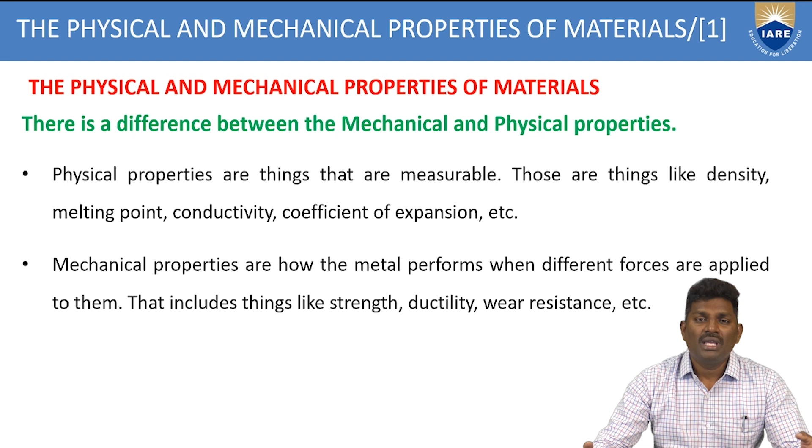For any application, if you want to develop a product, first you have to know the properties. Once you know the mechanical and physical properties, it is easy for us to select one exact component from several options, and that component can be used as an application to the developed product. So that is how physical and mechanical properties play an important role in selecting material for developing any product.

The mechanical and physical properties of materials are determined by their chemical composition. Chemical compositions are also very important - different materials have their own composition, depending upon the carbon content, that is the iron content of the material.

These materials are classified as ferrous and non-ferrous materials. In some applications, you may need ferrous types of materials. So how to identify the ferrous material? The composition is very important - how much iron is contained inside the material.

If you have a larger quantity of iron present inside the material, then it is called a ferrous material. In the same case, if you have less amount of carbon or iron content, those are called non-ferrous. So the composition again plays an important role to differentiate the types of materials and also their internal structure.

So in the previous sessions, we have discussed the different types of structures - face-centered, body-centered, hexagonal close-packed structures. All these structures help us identify how the atoms are arranged inside the body. Depending upon the atom arrangement, we can easily tell the mechanical properties of the material, the grain size, or the crystal structure. The size of the grain present inside the material also plays an important role.

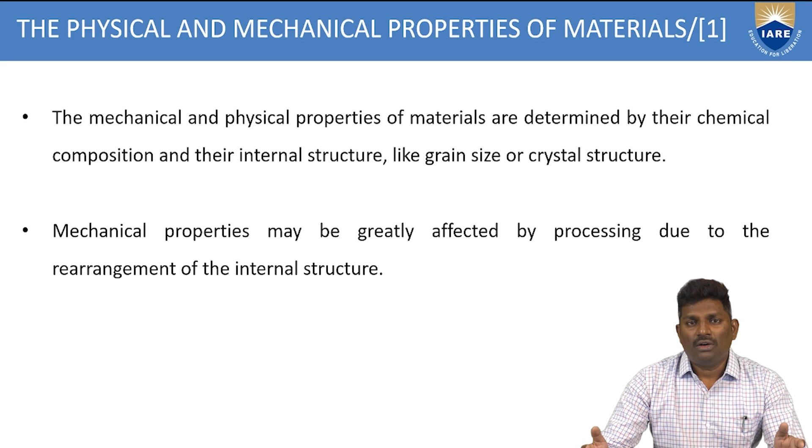Of course, point defects, line defects, any type of defect can be normalized with the help of the preheat process. That's why mechanical properties can be greatly affected or changed by processing due to rearrangement of the internal structure. Whatever arrangement is there internally, if you try to rearrange this structure inside the material, there is a chance of enhancement of the mechanical properties of the material.

Also, the metalworking process or heat treatment process might play a significant role. As we discussed, heat treatment is very important and plays a significant role in changing the properties of any type of material - suppose I have to build a product with some ceramic material or some polymeric material.

This polymeric material doesn't have the standard of properties I'm thinking of. What can I do? I can enhance the properties of that material by adding some other material to it - this is called a composite. But how can I add it? I can't directly combine material A and material B together. So how can I combine them and enhance the mechanical or chemical properties?

I can achieve this performance through heat treatment process or metalworking. In this metalworking and heat treatment process, I heat the material. Once I heat the material, I can make any number of changes to it - I can add other material, or I can manufacture different shapes. All these things can be achieved.

That's why the metalworking process or heat treatment process plays a significant role in affecting physical properties like density and conductivity. These are the main things which can be enhanced or changed with the help of the heat treatment process.

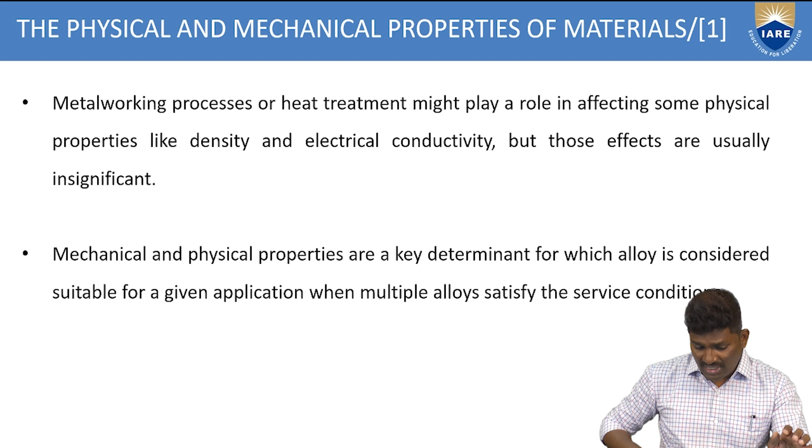High strength, for example, may be achieved at the expense of low ductility. The mechanical properties like strength and ductility can all be improved, depending upon your application. So selection of material is very important, based on which best material is selected for the required application.

In some cases, a high amount of load may be applied. If you see bridges, there is continuous load as all the vehicles pass over them. So the bridge has to resist this continuous load. Depending upon the type of load and the maximum load it can withstand, you have to design your structure in such a way that the material plays a key role there.

That's why material is very important - what type of load you are dealing with is one thing. Next, suppose you want to store a hot liquid in a flask - what type of material do you select? This hot fluid has to be sustained for about 5 to 6 hours. So if you know the exact application, only then can you select the material.

Selection of the best material is very important, and this selection depends mainly on the properties of the material. Once you know the properties exactly, it's very easy to select the material.

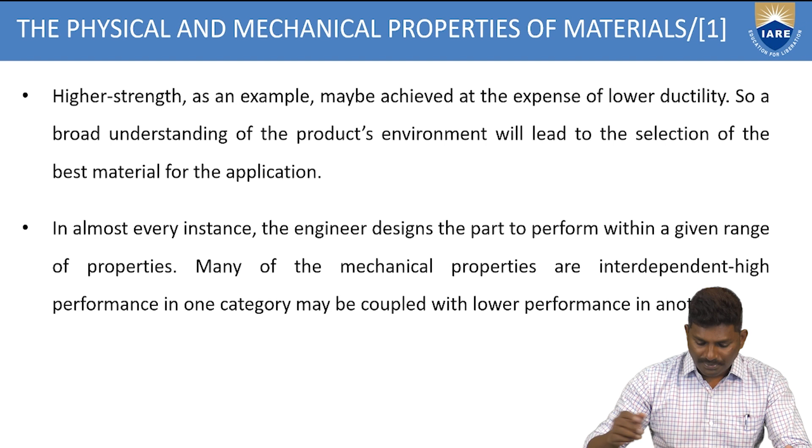That's why everything has some expiry limit - after that time there can be failure, and you have to stop at that point. Depending upon the maximum limit, engineers design the exact frames or bridges we construct. All this depends upon the load bearing capacity, so that is important.

Now, what are the main properties that influence materials? Some common mechanical and physical properties must be considered while designing any structure related to mechanical, civil, or aerospace fields. Material science is not restricted to mechanical engineering alone - all types of groups come into this. It is a multidisciplinary area where computers, electrical, aerospace, mechanical, civil - everything - materials play an important role.

Selection of material in any type of application is very important, and we select based upon the properties. The important properties we have to identify related to material selection are: first, conductivity; second, corrosion resistance; density; and fourth, ductility or malleability.

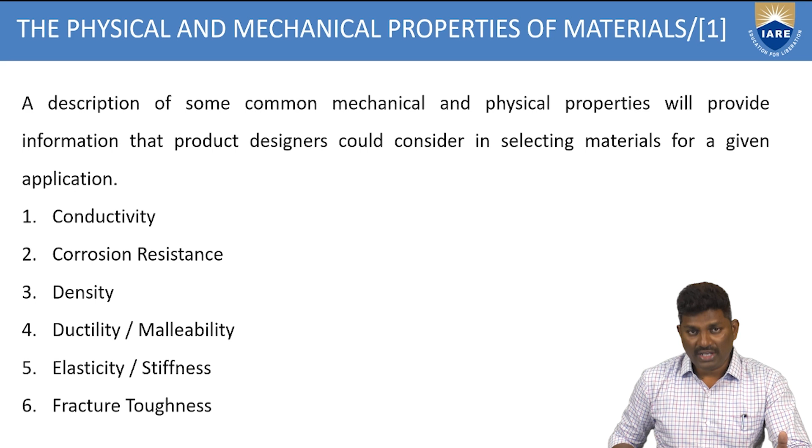Fifth one is elasticity or stiffness. Sixth is the fracture toughness, hardness, and of course the plasticity, strength, that is nothing but in terms of fatigue, coming to the shear, tensile and yield. The last one, toughness and wear resistance.

So these are some of the important parameters or properties which we have to take into consideration while designing any type of structure related to any type of engineering. All these properties have to be taken into consideration. Then only one can design or construct a good output.

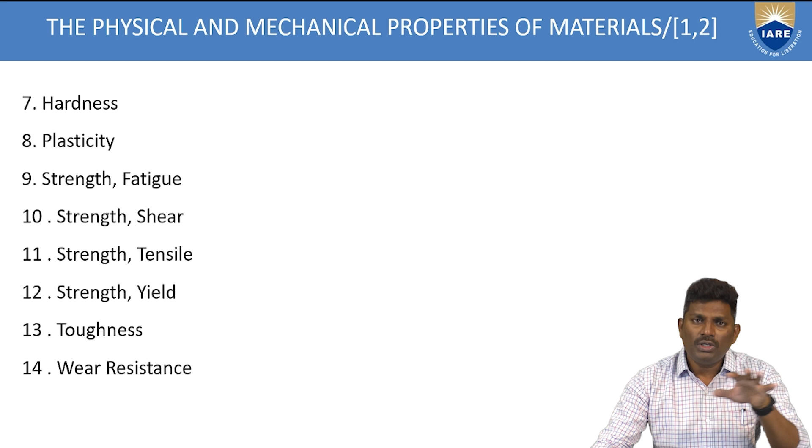So what is conductivity? How to define conductivity? How much energy is penetrating into the body? Here the energy is nothing but the heat. So how much amount of heat or energy is penetrating inside the body? This depends upon the conductivity - how much amount of energy is conducting into the material.

Based upon the conduction, you have to select the material. Depending upon the conductivity, each material will have its own thermal conductivity - that means how much amount of energy it can take inside, absorb in the body. Thermal conductivity is nothing but a measure of the quantity of heat which flows through the material.

So depending upon the value of the thermal conductivity, can you resist the heat or can you penetrate the heat into the material? All this depends upon the selection of material. So conduction is very, very important, which describes the amount of energy which is penetrated inside the body.

And it's a measure of degree per unit time, per unit cross-sectional area, or per unit length. This is how you will calculate how much energy is penetrating into the body per degree, per unit length, or per square meter. Like that you will try to identify and calculate how much energy is penetrating inside the body, and what this conductivity refers to.

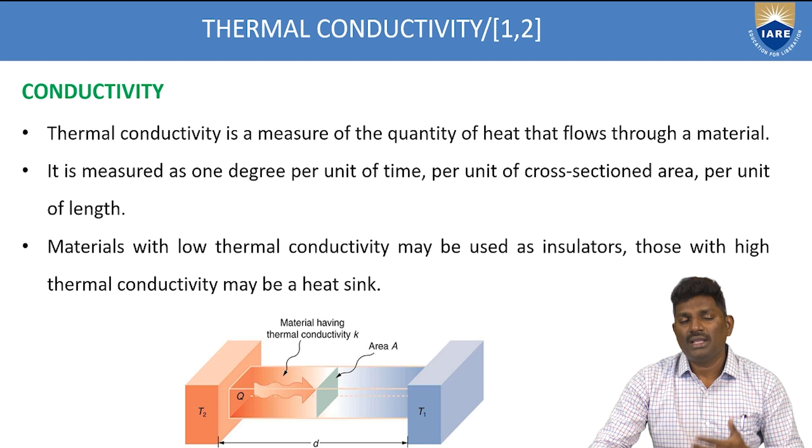So that's why thermal conductivity is the amount of energy which is penetrated inside the body. That is how you have to calculate it. If the value is very, very low, then these types of materials are used as insulators. So that is how you have to apply the materials depending upon your application.

So some of the examples we have seen. Metals that exhibit high thermal conductivity would be considered for applications like heat exchangers or refrigerators. Some metals have higher values of thermal conductivity, so these metals can be used in heat exchangers as well as refrigerators. Similarly, metals, plastics, or polymers will have different values of thermal conductivity. So depending upon whether it is a metal or non-metal, we select those materials for the applications.

Low thermal conductivity materials can be used in high temperature applications, like what we discussed in the previous slides, where hot fluid has to be stored for 2 to 3 hours. There also you can use low thermal conductivity materials. But exactly opposite, often high temperature components require high thermal conductivity. So that depends on the type of climatic conditions we are using.

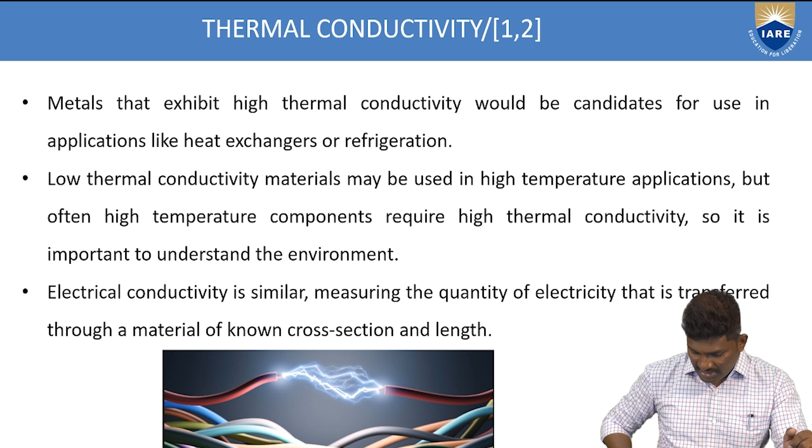And corrosion resistance. Every body is exposed to different climatic conditions or different chemical compositions during the working process of any product. All these materials are exposed, even humans are also exposed. Because of this exposure to different climatic conditions, there is a formation of some scale. Because of these formations of different scales or chemical reactions, there is a formation of corrosion.

Corrosion is nothing but it disturbs the complete body, it will try to cause failure. If the value of corrosion increases, slowly the metal will get into failure. Because of this natural chemical exposure to the environment, slowly the metal will be having corrosion, so we have to prevent this corrosion.

Corrosion resistance means you have to avoid the materials getting corroded. So what we have to do is give some coatings or painting so that the life of the metal can be improved, to reduce the value of corrosion. All materials will have some corrosion.

If you keep ferrous materials inside liquid, slowly it will start corrosion. The same material exposed to different climatic conditions, in cold or hot conditions, slowly after 1-2 years, there is a formation of rust, and this rust slowly converts into failure.

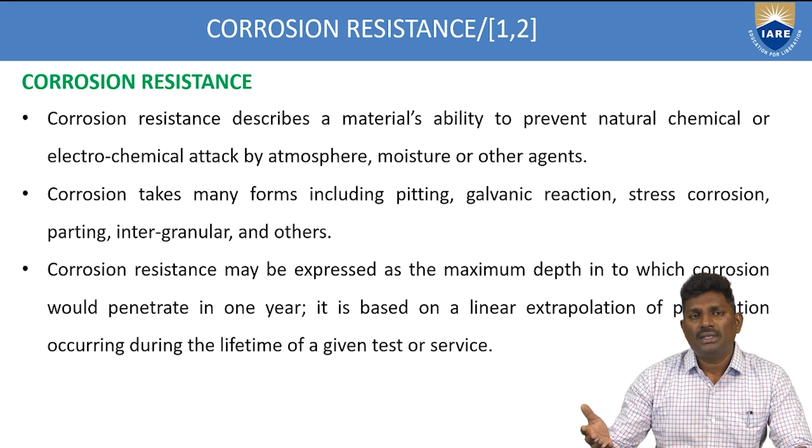So by giving some plating or coating, this will try to avoid the corrosion of the metal. These are ways to improve the life. We have seen previously how to select the material, and in this case, corrosion, how to improve the material by giving some coating, so as to avoid corrosion of the material.

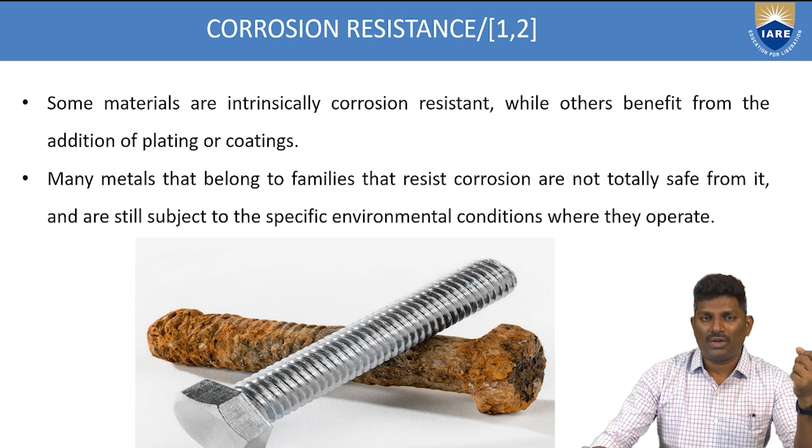So that is another point. Next is density. Density is how the atoms inside the metal are packed inside the material.

Weight will give the density of the material. The density of the alloy will determine how much a component of a certain size will weigh.

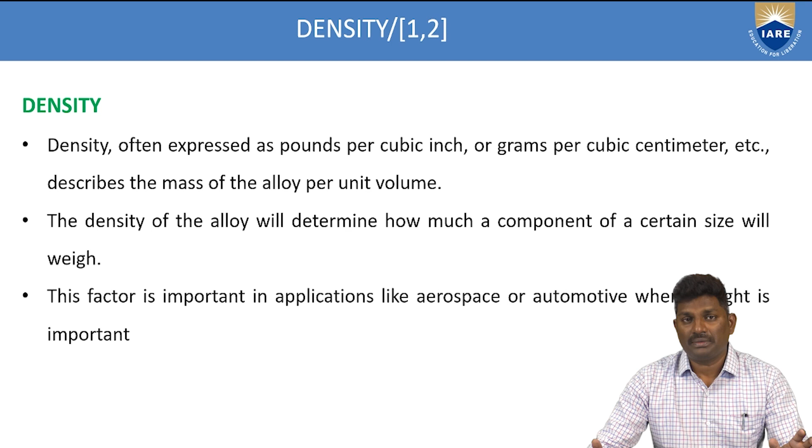Nowadays, because of low density, we get less weight. But we are trying to generate materials which have lesser weight while increasing strength. So depending upon the property required, you can select a low density material.

But when comparing strength, higher density materials may have better strength properties than low density ones. That's why, though you select a low density material, you can add some other material to improve the strength or mechanical property.

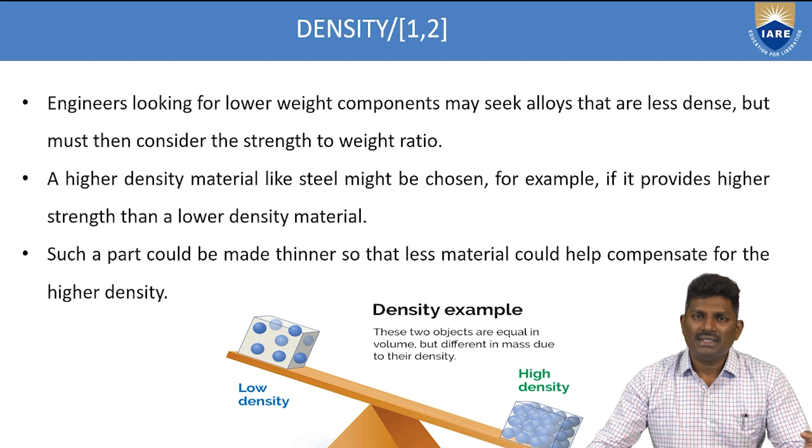That is how you can generate different types of materials with the help of composites. So all these things have to be considered - whether it's conductivity, strength, density, or corrosion - every type of property matters when selecting any material.

Coming to ductility - ductility is the ability of the material to deform plastically. That means I want to stretch any material, so it has to be stretched without breaking. That is the property of ductility - it can be deformed into different shapes without breaking.

So for any product design, when you're trying to generate the given raw material into different geometries without failure, that type of material is called ductile. You can make different shapes without breaking or fracturing, and it retains the new shape when the load is removed.

In some applications, we need to bend or get different geometries without fracturing, such as during machining operations where the size or geometry has to be changed. If the material does not fail during this change of geometry, it is called ductile. Materials with good ductile properties can be molded into different shapes.

The ability to stretch a given metal into wire - how are these wires developed? I have a 10 mm diameter huge metal wire, and through this I want to generate a 1 mm or 0.5 mm wire drawn out. This happens because of the ductility nature of the material.

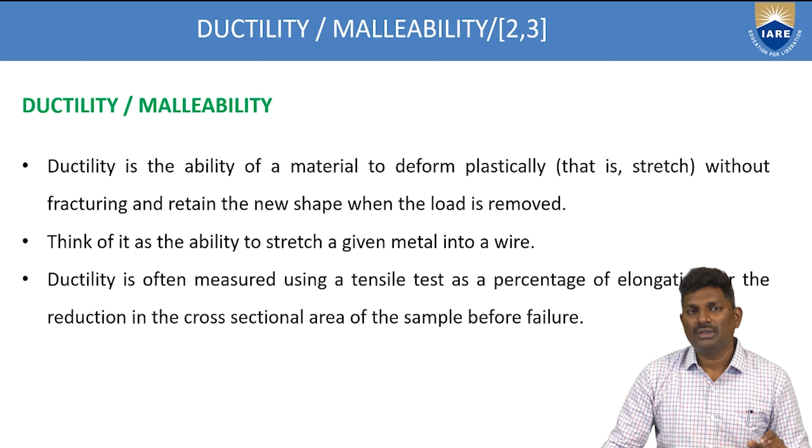If you calculate these two terms, then it is very easy for us to find out how much percentage of ductility the given metal will have. During this process, there is an increase in the length as well as a decrease in the diameter. So this is how you have to calculate.

A tensile test can also be used to determine the Young's modulus or the modulus of elasticity, which plays an important role as a stress-strain ratio. So how to calculate the strength depending upon these values can be done by the tensile test, which is called the Young's modulus.

The tendency of the material to resist cracking or breaking under stress makes ductile properties. During any type of machining process, the material has to resist from cracking or breaking. While you're drawing the wire from 10 mm to 1 mm, during this process the material does not crack. If it is cracking, again, the material does not have ductility. So all these things have to be taken into consideration, either scratching or cracking of the material - all this has to be avoided. Only then can that material be called ductile.

The cold working process also tends to make the metal less ductile. During the hot working process, you can have a good value of ductility, but during the cold working process, some properties like ductility may come down because of different conditions. During hot working, we do it at the recrystallization temperature, but during cold working, you are doing it at a much lower temperature. That's why the property of ductility may come down.

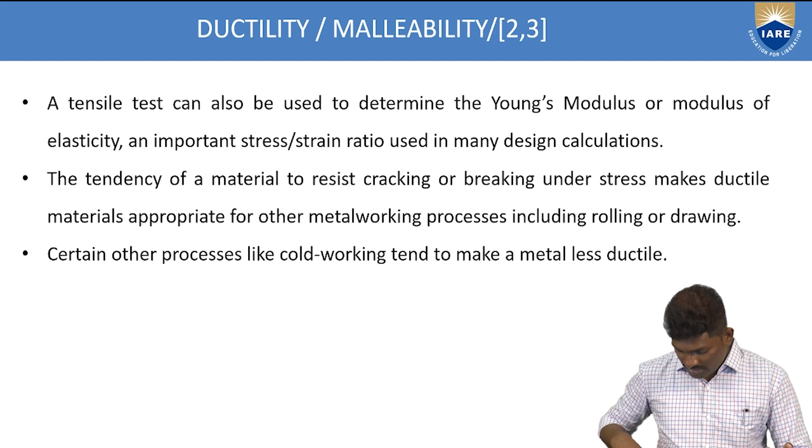Malleability is again a physical property which describes the metal's ability to be formed without breaking. You can twist the metal into different shapes, molding it into different forms, but there is no crack or break of the material. That characteristic is called malleability. In the previous case, ductility, there is no chance of breaking of the material. In this case also, malleability can be formed into different shapes, but there is no breaking.

Pressure and compressive stresses can be used to find out the value of ductility - well, we use tensile properties for ductility, but in the case of malleability, we use the compressive test. So it's exactly opposite - there we use tensile, here compressive. Compressive means two loads coming from opposite directions onto the same side. That is called compressive.

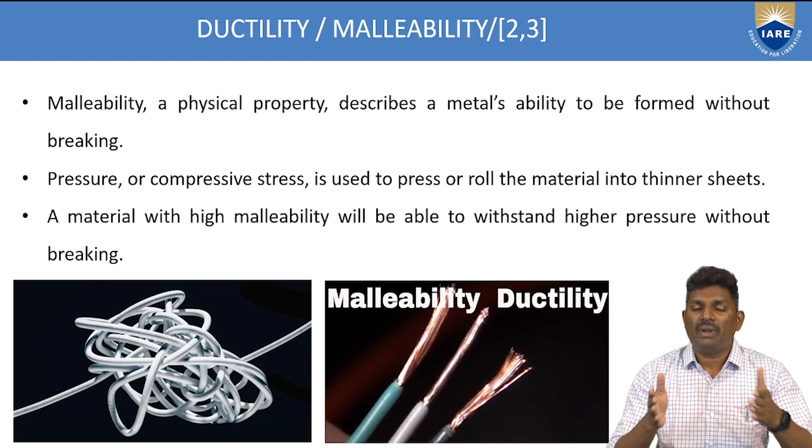A metal with high malleability will be able to withstand high pressures without breaking. Though you are giving a high amount of pressure on the material, it will resist without breaking. So in any application where a high pressure or high load is acting, like in the construction of railway bridges or dams, there is a high amount of pressure involved. There we have to select a material with good malleability property. You have to select the material depending upon your application. When a high amount of load or pressure is acting on the material, it may bend but it will not break. So there you select the material with these types of properties.

Next comes elasticity or stiffness. Elasticity describes the material's tendency to return to its original shape when a distorting force is removed. It is nothing but like a rubber band - if you apply a force on the rubber band, pulling from both ends, it will stretch. Again, if you release it, it comes to its original shape. That property is called elastic property. So you apply a load, it will stretch; when you release the load, it will regain its original shape. That type of system is called elasticity.

As opposed to elasticity, material exhibits plasticity - after the elastic property, plasticity will come, meaning it will stretch and then break. So that is the difference between elasticity and plasticity. Plasticity will break, but elasticity will regain its original shape after removing the force. The stiffness of material is often measured by the Young's modulus.

Different values of stiffness, toughness, ductility, and malleability are calculated with the help of Young's modulus, compressive strength, or tensile strength. Depending upon the type of application, we find these values based on Young's modulus, plasticity, or other properties.

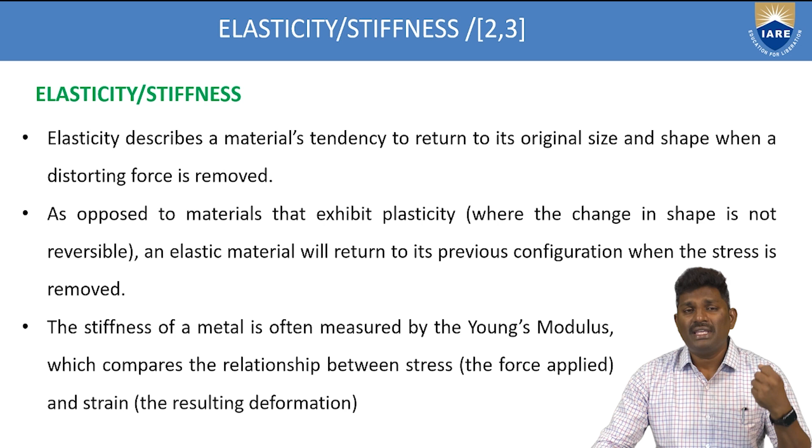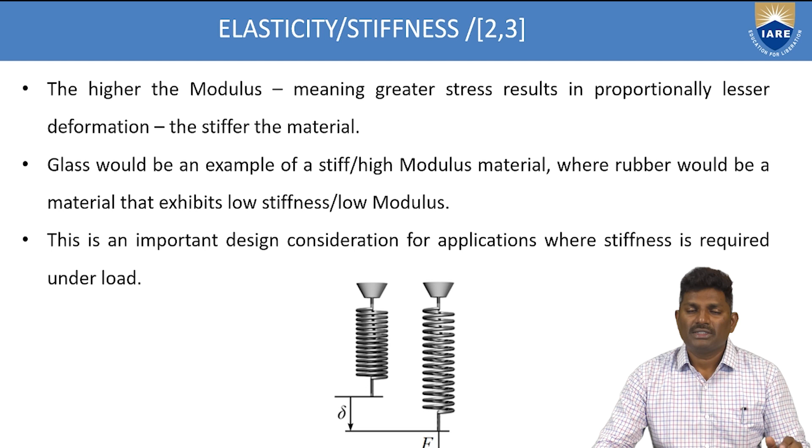If you see the higher values of modulus of elasticity, there is a greater chance of having these properties. Take the example of a spring: once you pull it down, if you remove the force, it comes back. That is the example of elasticity or stiffness.

Next, fracture toughness. Impact resistance measures a material's ability to withstand a shock. When sudden force, vibration, or impact is applied on the body, it has to resist without fracturing. The material must withstand sudden impact or force without shock. This ability is called fracture toughness.

The effect of impact is a collision that occurs in a very short period of time, a sudden impact of load. During this sudden impact, the metal has to withstand itself without shock. That is called good fracture toughness material.

Impact resistance should be included when the application involves elevated risk of impact, such as mineral exploration areas with high explosions, where sudden force comes onto the body. In these cases, the metal must be selected to resist forces that come suddenly for a short interval of time, not for a long interval.

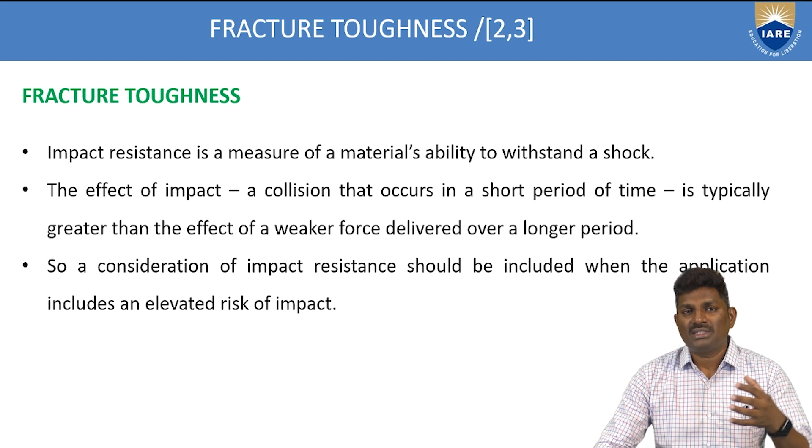In a very small, quick time, the metal has to withstand the load. So for such areas, we must select a material with the ability to withstand shocks. Certain metals may perform acceptably under static load but fail under dynamic load.

Here, depending on the type of load—static or dynamic—some metals can withstand static load but may fail under dynamic load. So depending on the type of load, you have to select the material. Not only static or dynamic, but uniform load and time interval also must be taken into consideration while selecting the material.

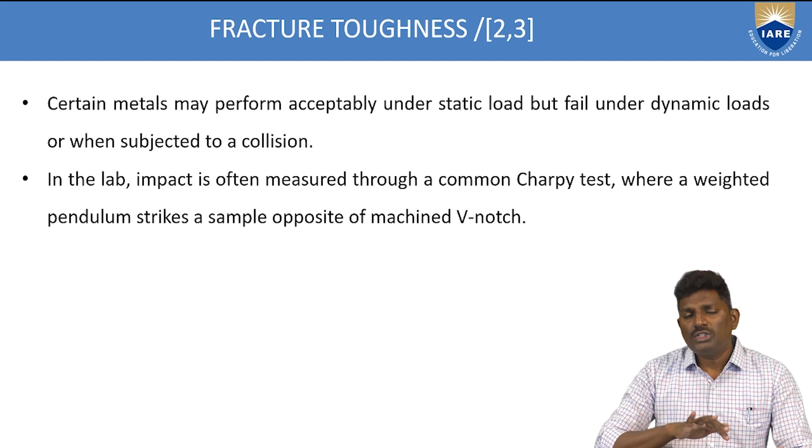What is hardness? Hardness is defined as a material's ability to resist permanent indentation, or plastic deformation. When a high load is given, the material has to resist permanent indentation, which is the failure of the material through plastic deformation. A material that resists this is said to have very good hardness.

Hard materials better resist wear or deformation. If you have a highly hardened material, there is less chance of deformation or failure. The term hardness also refers to the local surface stiffness of materials, or its resistance to scratch, abrasion, or cutting.

During machining processes like scratching, abrasion, or cutting, due to vibrations or applied load, the material slowly wears down or transfers to another part. Materials that resist all of this are called hard materials.

Hardness is measured using methods like Brinell hardness and Vickers hardness. Different types of tests exist to find the values of hardness, ductility, malleability, corrosion resistance, and stiffness—all can be calculated with the help of different types of tests.

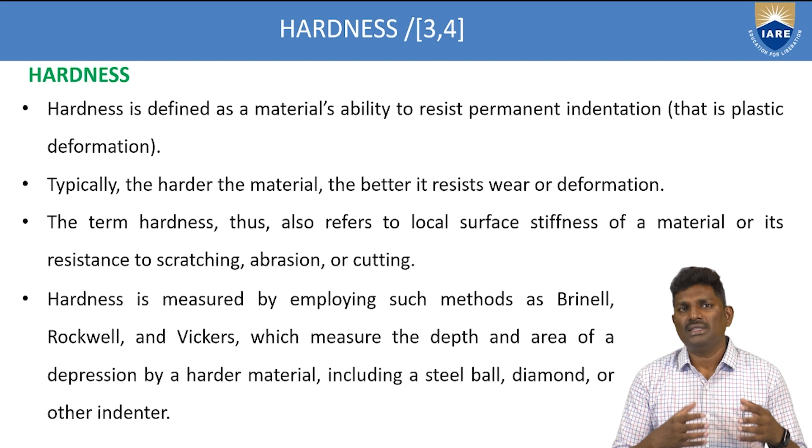While doing any machining operations, the cutting tool has to be selected in such a way that it has a high hardness value. That's why in any manufacturing industry, most cutting tools are diamond tipped, because the hardness value is very, very high, so it can cut any type of material using these diamond tipped cutting tools. This is how you select.

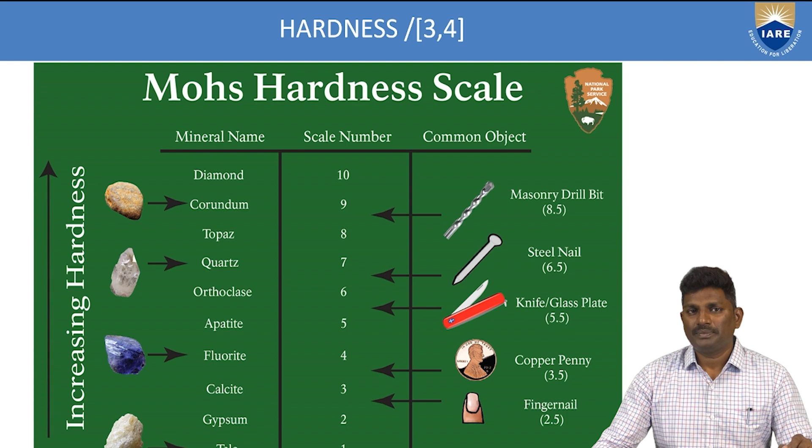Next, coming to plasticity, this is nothing but the opposite of elasticity, which describes the tendency of a certain solid material to hold a new shape when subjected to forming. So plasticity is what happens after elasticity.

Elasticity is when you apply a force, it will deform, and if you release the force, it will come back to its original shape. That is elasticity. Now coming to plasticity: if you apply some force, it will deform its shape, and if you release the force, it will remain in the deformed shape only. It will not regain its original shape. So that is the difference between plasticity and elasticity.

During this forming process or any manufacturing process, any material which has a high plasticity value will deform into different shapes according to the force applied, but it will not regain its original shape. That is the description of plasticity, and it is the quality that allows the material to bend or work into permanent new shapes. If you want to form permanent new geometries, you have to select a material with good plasticity property.

Materials transition from elastic behavior to plastic behavior at the yield point. So at the yield point, you get the transformation of materials or metals from elasticity to plasticity. Before reaching that yield point, you have the elastic zone, where the material regains its shape. After crossing the yield point, this elasticity slowly converts into plasticity, where complete deformation occurs.

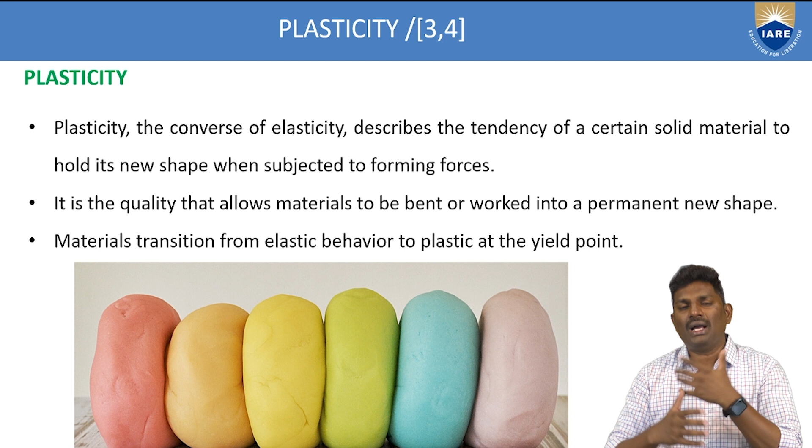Coming to strength, you have fatigue. Fatigue can lead to fracture under repeated or fluctuating stresses. If you continuously apply forces on any type of material, slowly there are distractions or fractures inside the material, because of the continuous load being applied. So this is about fatigue in terms of strength. If any body has a continuous load, it tends to get some fracture inside.

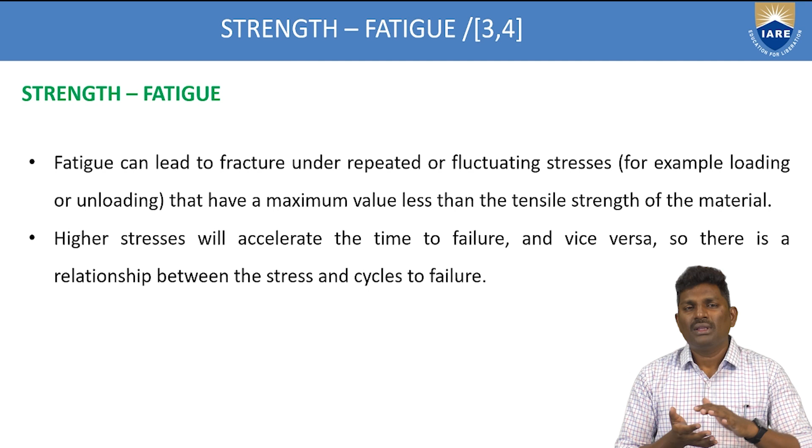That maximum value is less than the tensile strength of the material, and higher stresses will accelerate the time to failure. Continuous stresses applied on any type of structure will cause the metal to fail after some interval of time. The fatigue limit refers to the maximum stress the metal can withstand. Fatigue is the continuous, repeated load applied on the body, and up to what interval of time this load can be borne gives the fatigue limit.

And conversely, the fatigue life measures the load fixed and measures how many load cycles the metal can withstand.

If in some cases there is a continuous load being put onto the body, like in a flyover or a bridge, there is continuous repeated load. Because of this continuous repeated load, there is some disturbance in the material. So up to what limit this continuous load can be withstood describes the fatigue. Fatigue limit refers to the maximum stress that metal can hold without fracturing. This is the area where continuous load is acting, so you have to select a material with a good fatigue value.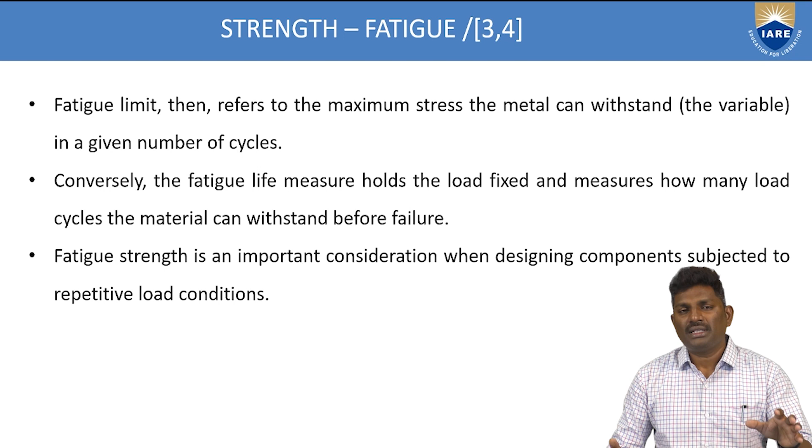Now in terms of shear, shear strength is a consideration in applications like bolts or beams. When you apply high pressure during bolt tightening or in beams, you're giving a high amount of load, so a shear load is applied on the body. Up to what point this shear load can be resisted during the working process is described by shear strength. Shear occurs when directional force causes the internal structure of the metal to slide against itself at the granular level. If you are tightening a screw or bolt, at what interval it can withstand gives the strength of the shear.

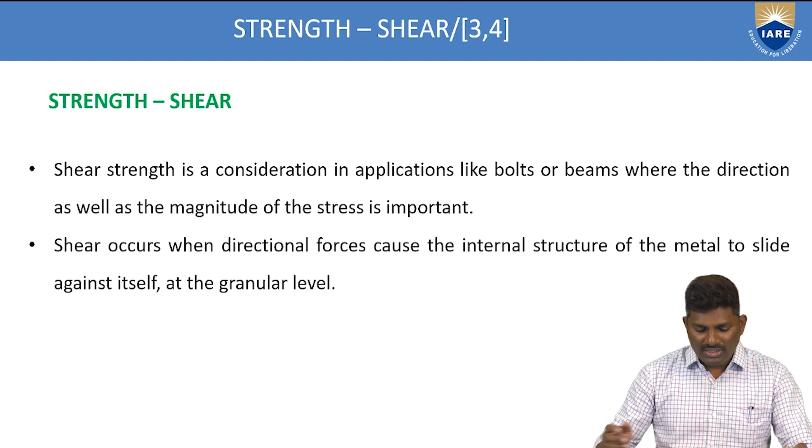Again, tensile strength is the elongation of the material. If you pull the material from both ends in opposite directions, there is a tensile strength. At what point the material can withstand without breaking - if you continuously pull the material, at some point it may break. So what is the maximum limit up to which this tensile force can withstand? Like a rope bridge - if you apply a point load, slowly it will expand. This expansion or tensile force applied on the body, and the maximum point it can withstand, you have to take into consideration while designing anything.

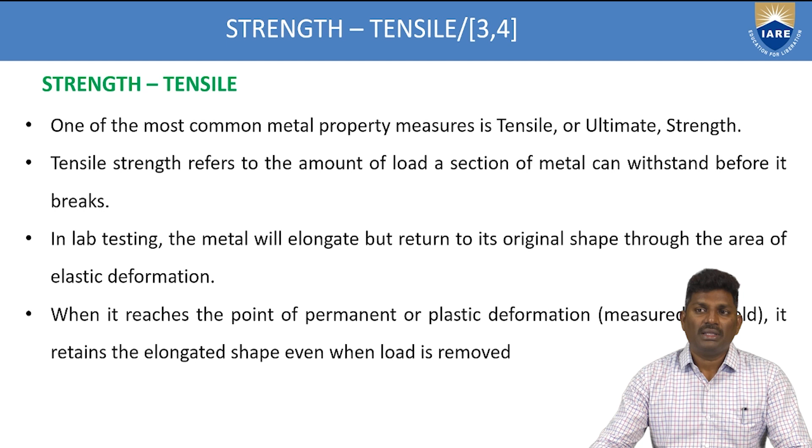It reaches the point of permanent or plastic deformation, which is also calculated with the help of the yield point. At the tensile point, the load causes the metal to ultimately fracture. After reaching that limit, slowly it gets fractured. So you have to find out the tensile properties of the material - the maximum tensile property is calculated with the help of the ultimate tensile strength value. Depending upon that value, you design your structure such that this is the maximum limit where the metal can be tensile to that point.

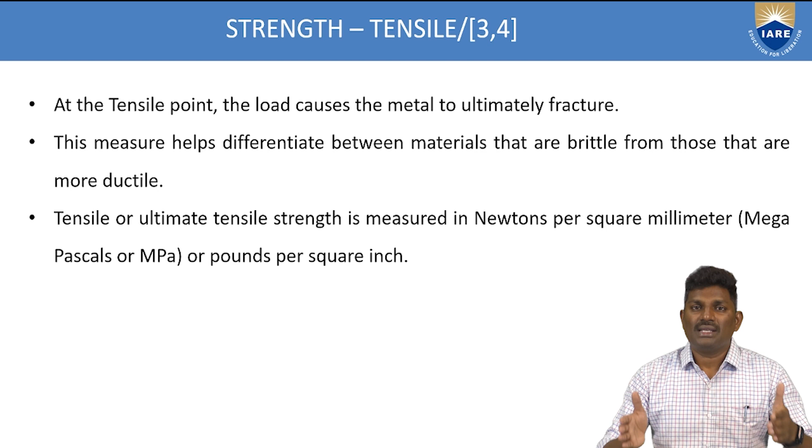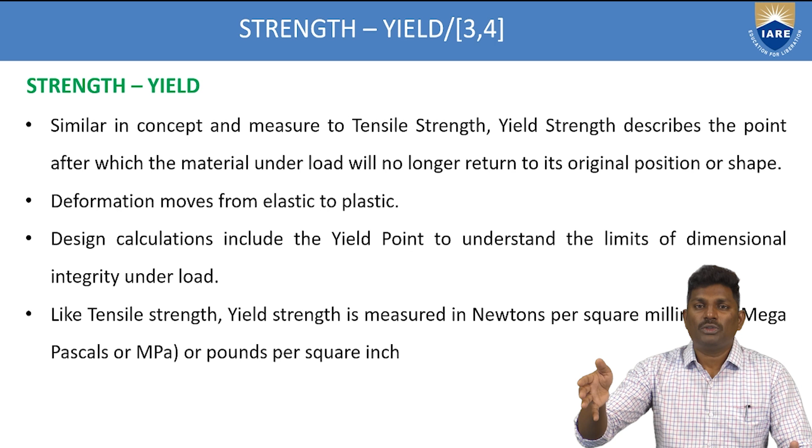Coming to yield, this is related to tensile strength and yield strength together - these combined describe the yield strength the material will have. The deformation moves from elastic to plastic, a transformation every material undergoes, which means the failure of the material. What is the maximum value the material can withstand up to the elastic limit? This is calculated with the help of the yield point to understand the limits of dimension under load. Different types of load are applied on the body, and calculating the maximum limit of the yield point tells you when it converts from elastic to plastic - one of the criteria to consider while designing any product.

Toughness is measured using the Charpy impact test, similar to impact resistance - how the body can resist when load is acting on it, or different types of heat or energy are involved inside the body. That is calculated with the help of the Charpy test. These are all the different properties you have to know, how to calculate these values, and depending upon these values, how to design your structure - everything matters. Generally, Charpy values are commonly prescribed for ferrous alloys where possibility of low temperatures exists. This is applicable only for ferrous, not non-ferrous alloys - we use these Charpy tests only for ferrous applications to find out the toughness of the given material.

Some examples where you can use these: ballistic containment in military or aircraft applications - you can use these types of materials where you need high toughness values for ferrous alloys.

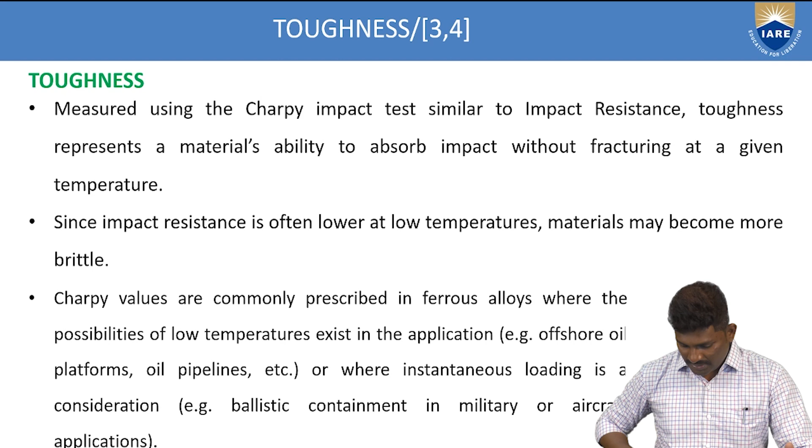Wear resistance is the measure of a material's ability to withstand the effect of two materials rubbing against each other. When two different materials rub against each other, there is some wear—cracks forming due to friction. There is continuous contact and continuous rubbing, which generates heat and friction, causing crack formation. This can be seen as adhesion, abrasion, or scratching—all coming under the category of two materials rubbing against each other.

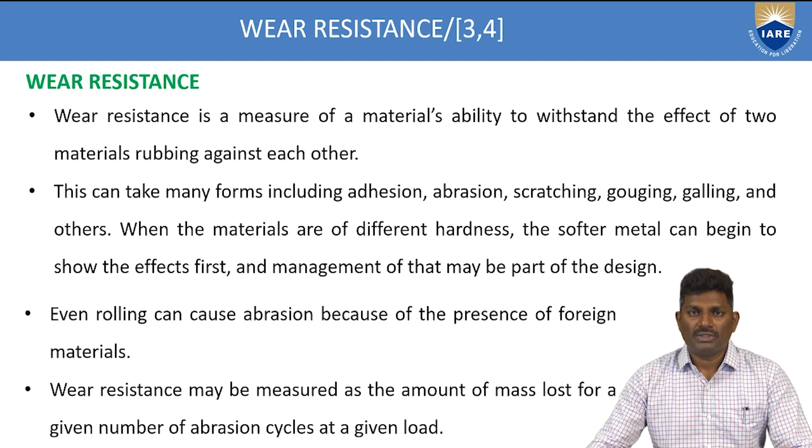Now let's see the complete summary of this session. Considering this information about mechanical and physical properties can promote an optimized metal selection for a given application. If you know all these parameters—the physical and mechanical properties of any material—you can easily select the exact optimized material for the application. These are the major applications we have discussed; any material will have these types of properties, and based upon them it is easy to find the exact material.

Because of the multitude of materials available—there being a lot of exploration of materials—the ability to modify properties through alloying can also be done with the help of heat treatment. It can be time well spent to consult metallurgy experts to select materials that provide the needed performance balance with cost effectiveness. So the availability of materials is very high, and selection of the exact material depends upon your application.

If you don't have the required material, you can improve it using a heat treatment process, which can enhance its properties if you know its basic properties. This is helpful for designing any product, construction, aircraft, or any type of engineering—material selection is very important. If you know the physical and mechanical properties, it's easy to get the optimized material selection for a given application, and also to improve properties of any material using heat treatment.

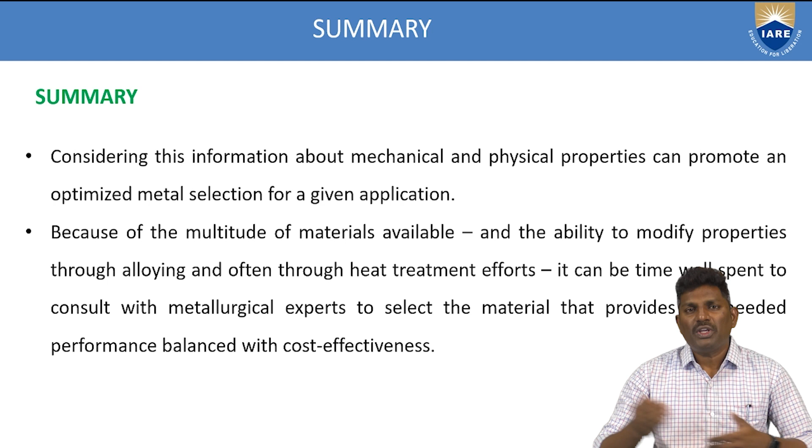You can also consult experts from the metallurgical team and try to bring out new metals with lower cost effectiveness. This is how you can get this information.

Thank you for the session.